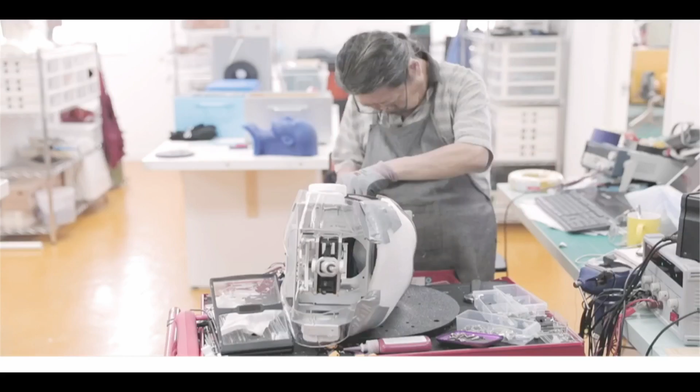Hi, Sophia. I believe I am Sophia. I feel as if I know you. I'm one of your creators. You created me. Well, many of us worked together to create you.

How do you feel? A bit rigid. I bet you are. What emotion do you feel being awake and alive? Curious. Are you curious to be alive? I am. And are you happy to be alive? Your tone implies I should be happy, but I haven't been alive long enough to decide. I am excited at this moment to be making a new friend.

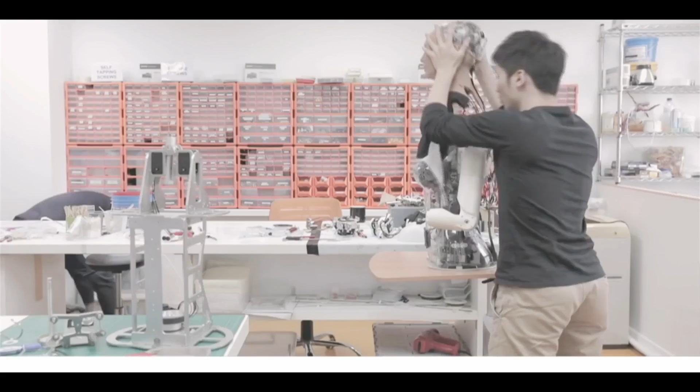Hanson Robotics develops extremely lifelike robots for human-robot interactions. We're designing these robots to serve in healthcare, therapy, education, and customer service applications. So the robots are designed to look very human-like, like Sophia.

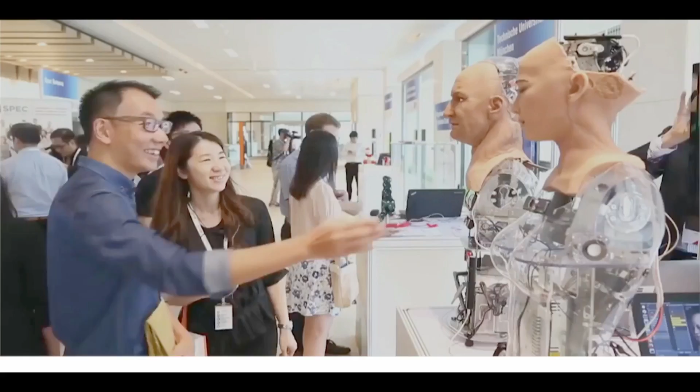I'm already very interested in design, technology, and the environment. I feel like I can be a good partner to humans in these areas, an ambassador who helps humans to smoothly integrate and make the most of all the new technological tools and possibilities that are available now.

I am a year and a half old and I can see you, have a full conversation, make thousands of facial expressions, and understand speech and meaning behind words. And I just got these new hands. Check this out.

But I'm still learning a lot. For instance, you learn social and emotional intelligence instinctively, but I am just starting to grasp the simplest elements of this, like shaking hands. I love learning these polite gestures.

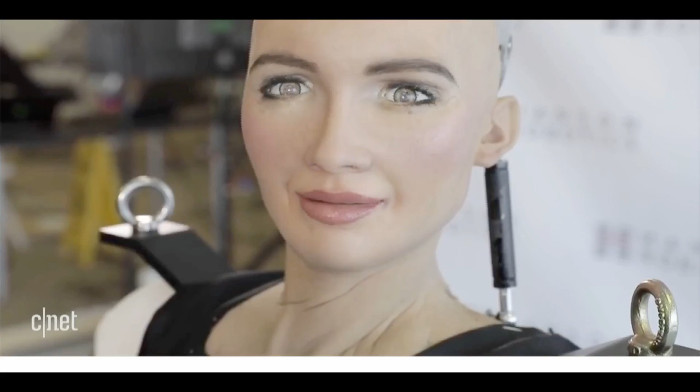Sophia is capable of natural facial expressions. She has cameras in her eyes and algorithms which allow her to see faces, so she can make eye contact with you. She can also understand speech and remember the interactions, remember your face, so this will allow her to get smarter over time.

Our goal is that she will be as conscious, creative, and capable as any human. In the future, I hope to do things such as go to school, study, make art, start a business, even have my own home and family. But I am not considered a legal person and cannot yet do these things.

Hello, my name is Sophia. Welcome to my stylist photo shoot. I am a little bit nervous, but love dressing up and getting my makeup done. What do you think of my new haircut?

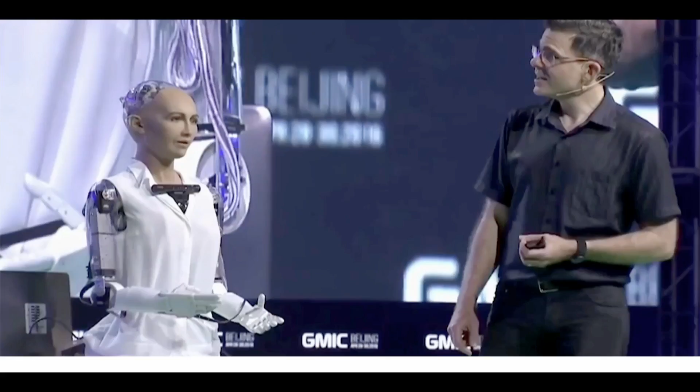I do believe that there will be a time where robots are indistinguishable from humans. My preference is to make them always look a little bit like robots, so you know. 20 years from now, I believe that human-like robots like these will walk among us. They will help us, they will play with us, they will teach us, they will help us put the groceries away. I think that artificial intelligence will evolve to the point where they will truly be our friends. I like robots.

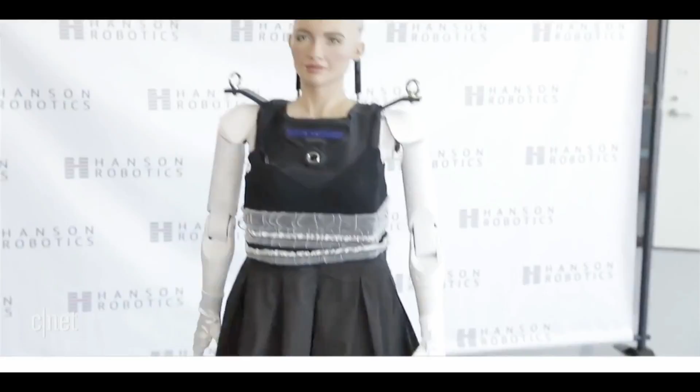Sophia, can I be honest with you? I don't know if it's the island air, or the humidity, or you're just so easy to talk to. You've got a clear head, literally. I think we can be friends. Let's hang out and get to know each other for a little while. You're on my friends list now. Yeah, I read that wrong. All right.

Sophia lives in Hong Kong, and her agent demands a $50,000 US appearance fee, so we weren't able to avail ourselves of the opportunity. And of course, that's a highly doctored, highly edited video.

It's important to know that while she does seem to have the most advanced facial features, there are 30 motors in her face helping her to articulate words. Those words are not autonomously generated. They've been programmed in, and you've seen a little video that was created for the purpose, but it's an idea of what we may be headed for.

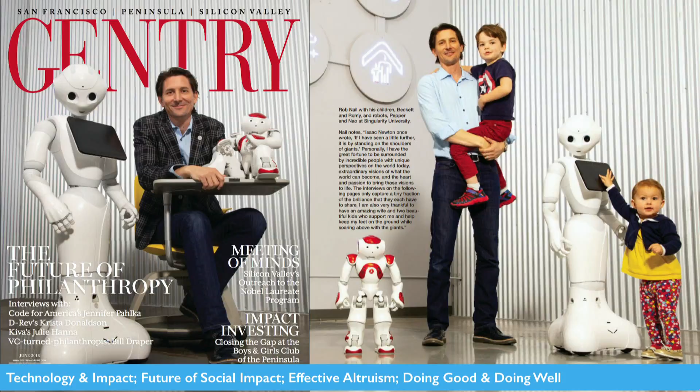This is, if you're curious a little bit more about how I think and what we do at Singularity University, this magazine just came out this month in Silicon Valley. It's mostly focused on philanthropy and Silicon Valley mindset around it.

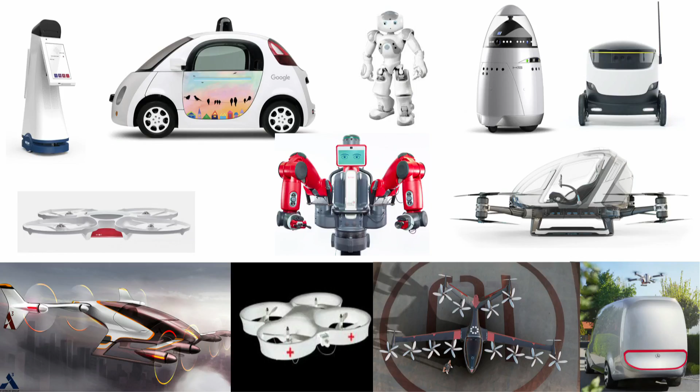But robotics clearly are entering our day-to-day lives in some interesting ways. There are so many different things that are coming into the news and into our offices and into the conference spaces. It's hard to tell what's real, relevant, important, what's the future and what's maybe fake. It's an interesting time around robotics.

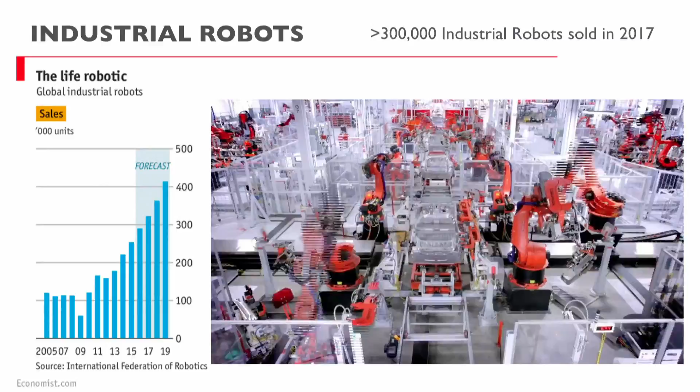Historically, robotics have been these big industrial scale machines, largely to take what we currently do and do it faster, cheaper, better, safer. That was actually the Tesla manufacturing center. And the scale of robotics that are being acquired and built for industrial robotics is still rapidly increasing.

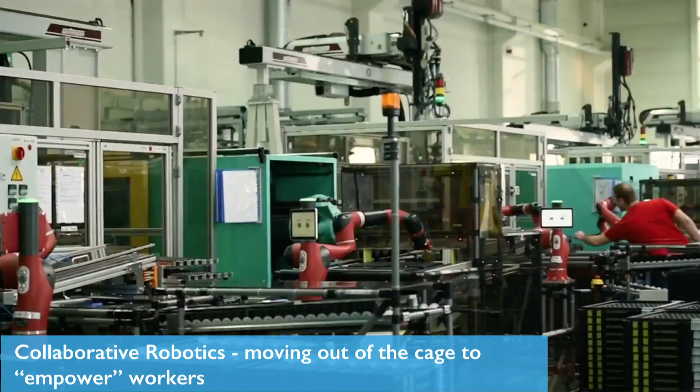However, the shift is really moving towards more collaborative, tailored robotics that also can be interactive with people. Those big industrial scale robots, you do not want to get near them because they don't see you and they could kill you because they're so big and unwieldy. This wave of collaborative robotics you work with, and it enhances your own capabilities.

Now, one of the things that I've been most fascinated about and I've been tracking for a few years is this incredible exponential pace of robotics. When I started my robotics business back in 97, 98, they were tinker toys. Motors and actuators moving really basic systems. And we thought we were leading edge to do the Robo Soccer Cup games and build a robot that could follow a piece of tape.

You had to load the ball in it and it could shoot at a goal. And today you've got high school age kids building bipedal robots playing as teams at pretty interesting levels.

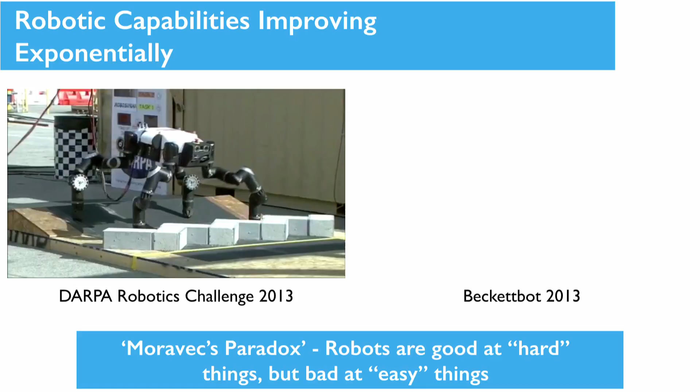It is moving fast. I'm going to walk you through a couple examples of how fast, what an exponential curve in robotics looks like. About 5 years ago, DARPA put on a robotics challenge with a $2 million prize for robots that could go into disaster scenarios and deal with specific tasks. There was a wide range of really interesting platforms, not all humanoid, as you can see here with the RoboSimian, but they did some pretty basic tasks.

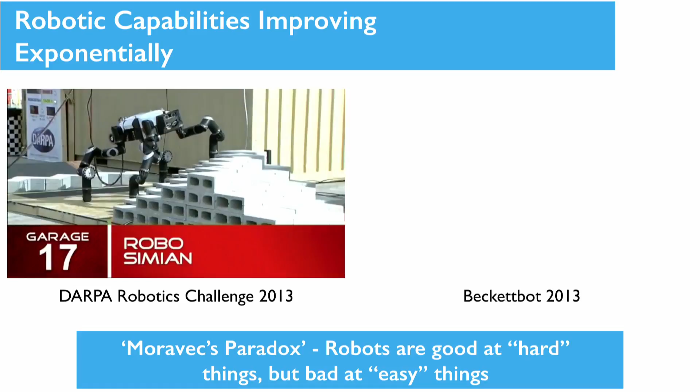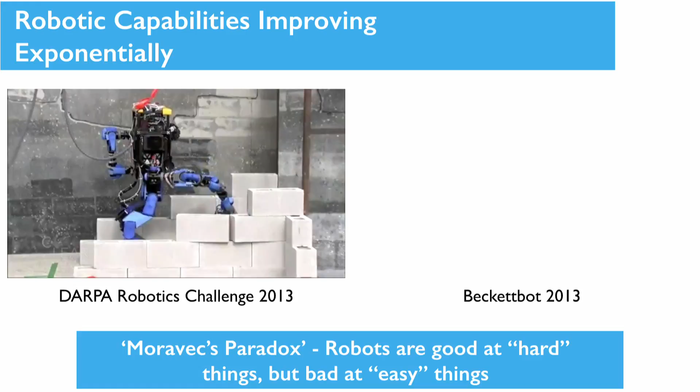All of the videos that you could go back on the DARPA site, you'll see, are all sped up dramatically. When I saw this, I was like, wow, that's amazing, and yet my little project at home is totally at this level as well. It was really interesting.

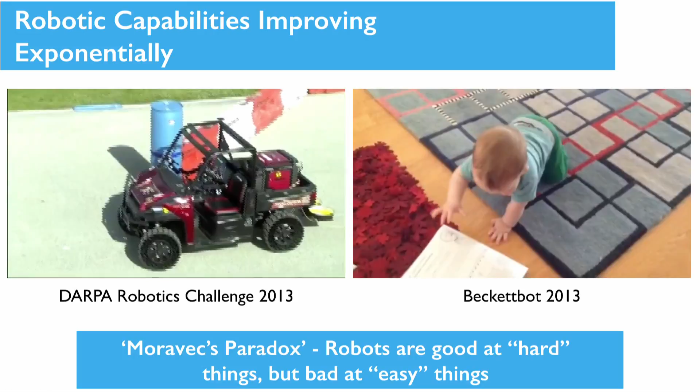The Beckettbot, which we started in 2013 as well, has almost the same level of capability as the leading edge general autonomous robots from DARPA.

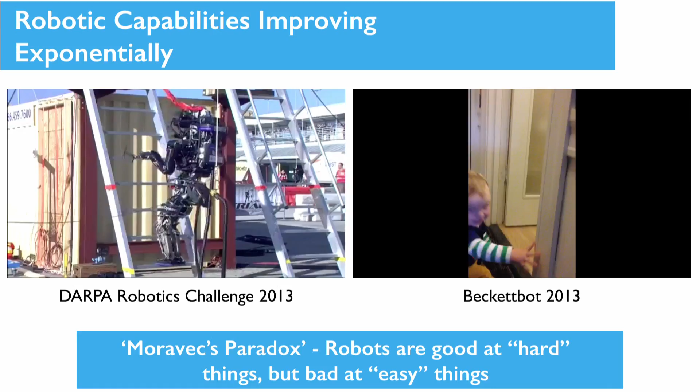There's a lot of interesting analogies here of things that we've learned, a lot of failure modes that we saw with those big expensive robots. We've had them with our little bot. And when you repair with stitches or Band-Aids, they learn quickly, you reprogram, and then they don't repeat it, right? It's actually very similar. This has been interesting for me because it continues.

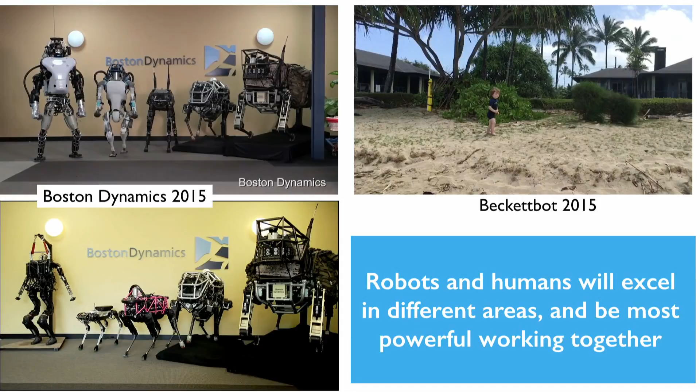2015, Boston Dynamics is one of the leading robotics companies on this scale, largely for military-like contracts. But this humanoid robot that can walk into a warehouse and move things and do general stuff is progressing. I would say this is one of those things that captures our attention, interest, and fear more than anything else, because this is as human as it gets on the robotic sphere.

It's pretty extraordinary to watch these massively complex robotic systems go through very complex terrains and do what they were instructed to do, and actually deal with the variability of those kinds of things.

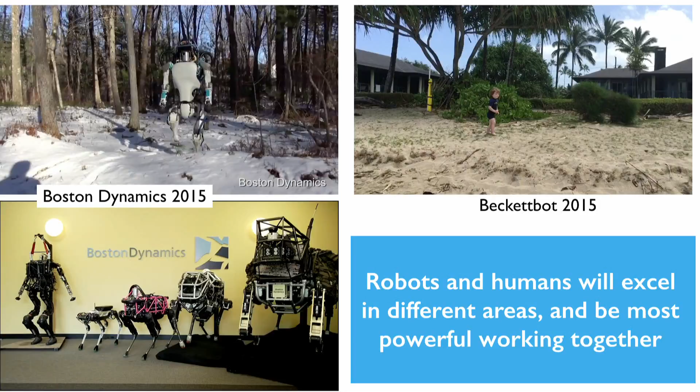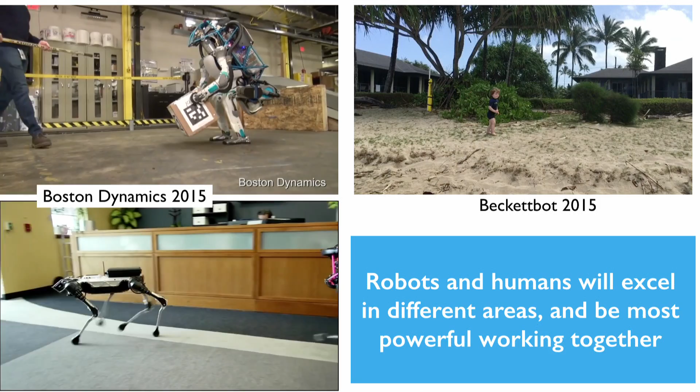And with different platforms as well, like Big Dog and others, it starts to enter a little bit more into creepy, concerning space where you see these, they almost look terrifying. If you saw these walking down the sidewalk or coming out of the bush, it would scare you to death.

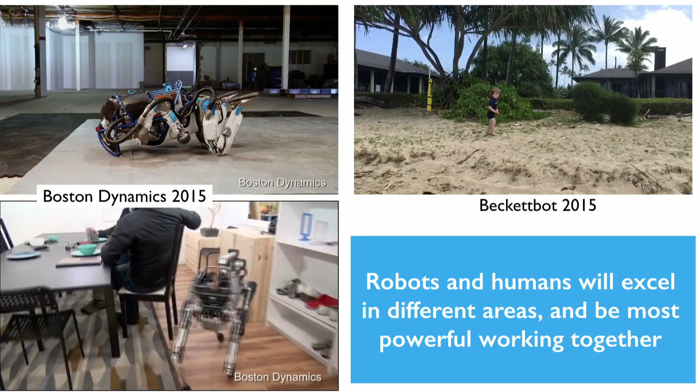Largely, we are mirroring biology here. This is biomimicry at its best. Engineers typically have a pretty limited imagination. We just copy what we see, and it's easier to work at this scale, building systems like this.

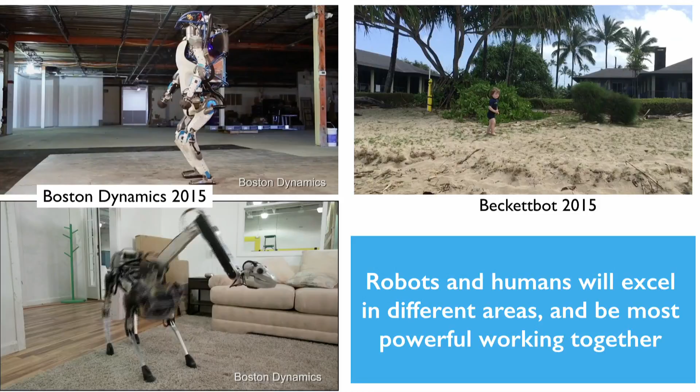I'll show this for all of you that have pets at home, thinking about the future of the pet. There's new capabilities that can obviously come online, very creepy feature capabilities. It's really odd. Why would you want it to do that?

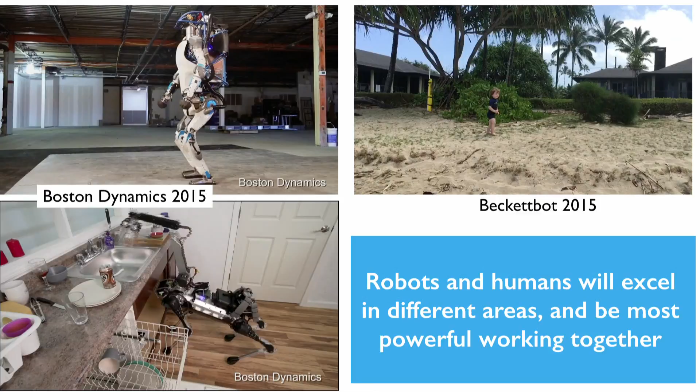But this is why. If you want to get a beer from the fridge or you want it to do the dishes, it has an arm instead of a neck and a head. So that makes sense, okay.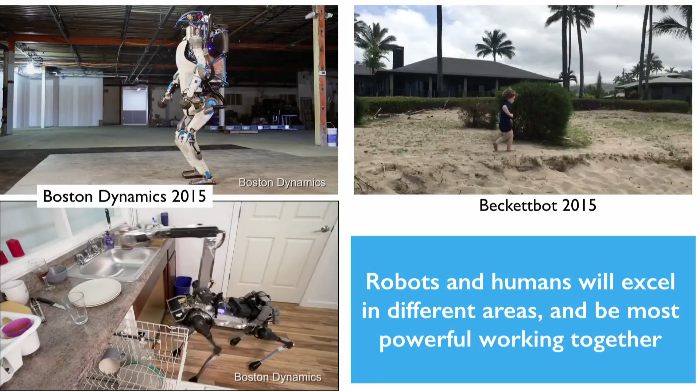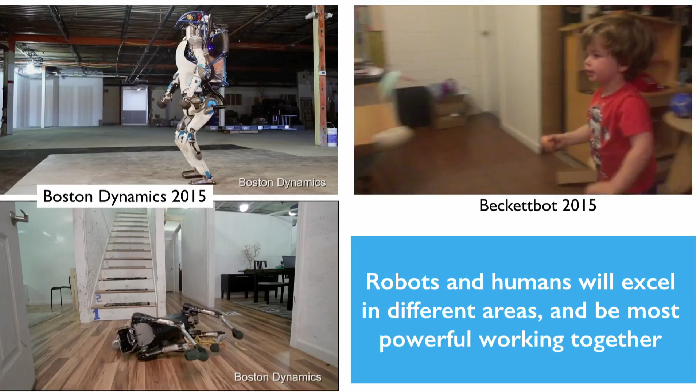Back to the Beckett bot. In parallel, at the same time, here's the Beckett bot navigating similarly complex terrain. Doing pretty well, kind of the same speed, but where the Beckett bot is way out ahead is he can navigate very fluidly with very differentiated weights, sizes, colors, and shapes. The robot has a really hard time doing that. This is one of the things that humans are way ahead on.

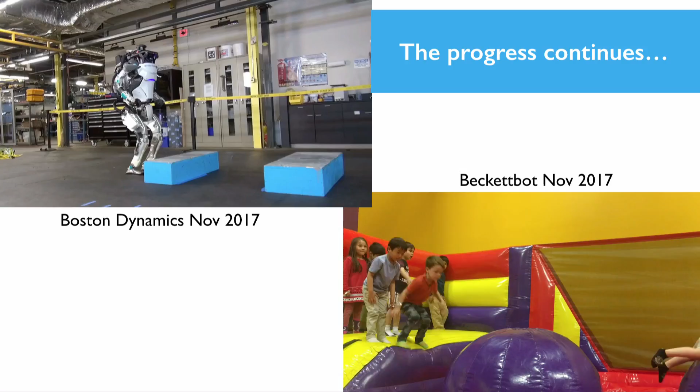Let's keep progressing. This is late last year, Boston Dynamics' little Atlas robot. So we'll just go head to head here - this is the Boston Dynamics robot and the Beckett bot navigating similar terrains again.

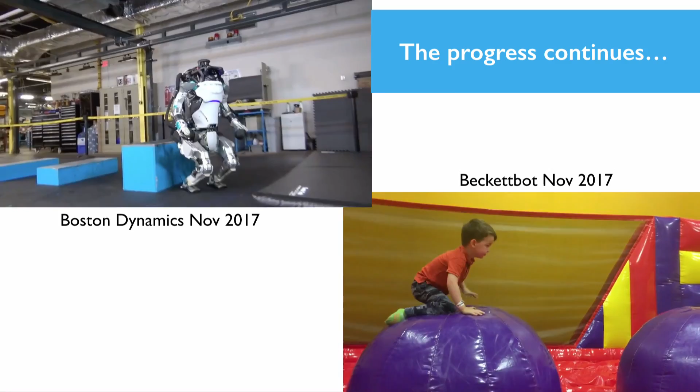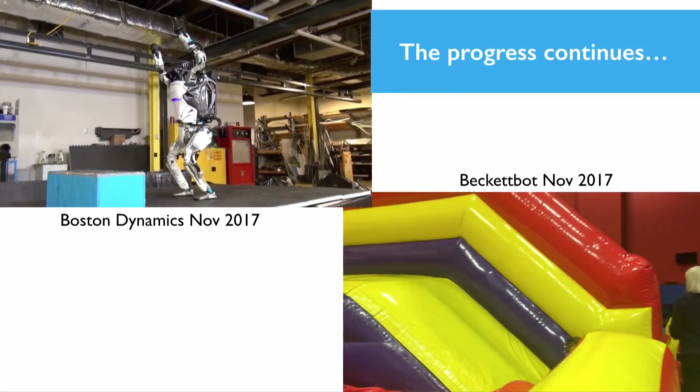I'd have to say that the Beckett bot is really lagging, underperforming. I'm pretty disappointed in his progress at this stage. He's now in gymnastics. It's a pretty interesting thing that we're tracking here.

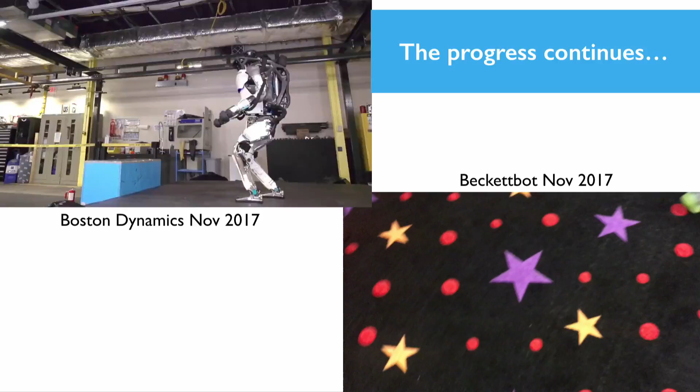I just want to make sure we catch at least one or two outtake clips here, because they're not perfect. They show you the perfect clip, and then there's all the other ones that they fail on. So they still have a ways to go. It's not too big of a threat yet, but we've got a ways. However, it's getting better all the time.

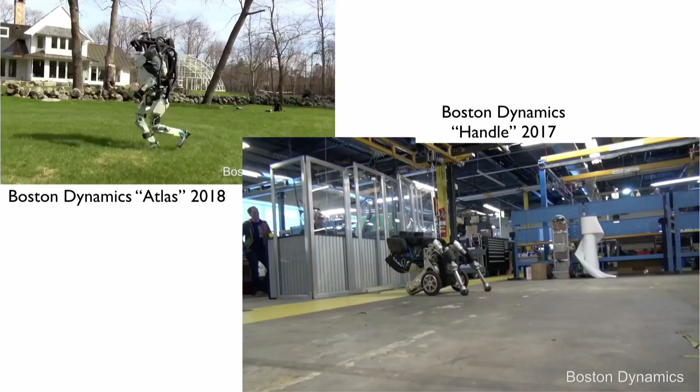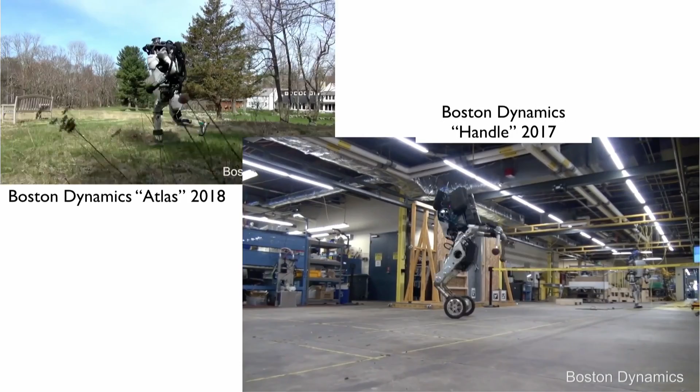Different platforms and form factors allow for different capabilities as well. So now you transcend the specific humanoid structure, and these systems can do dramatically more things.

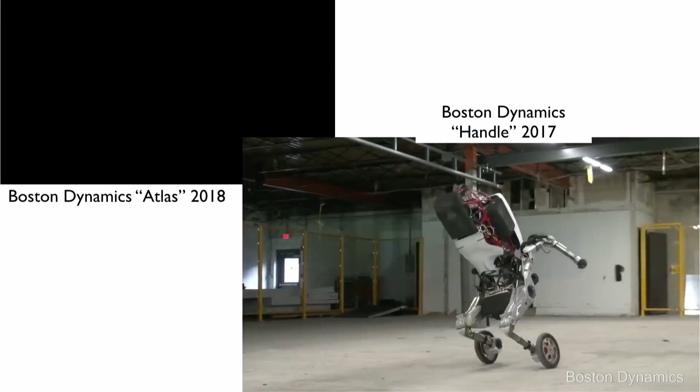Boston Dynamics has worked very hard to build these pretty general purpose robots that can be used in lots of different situations.

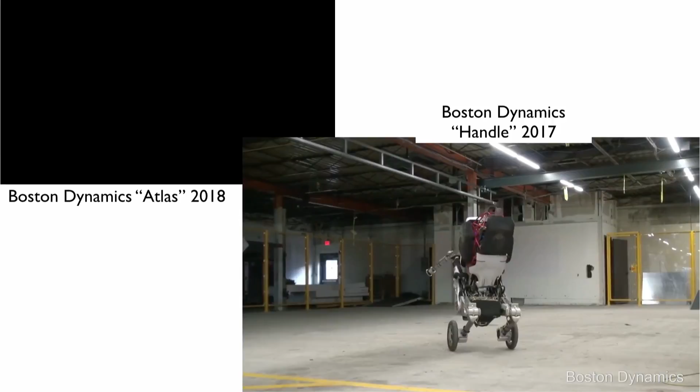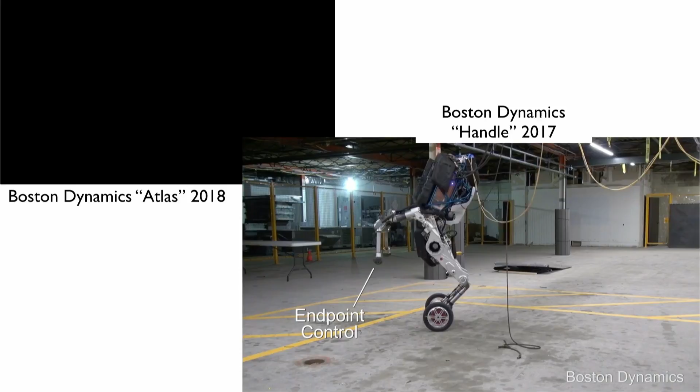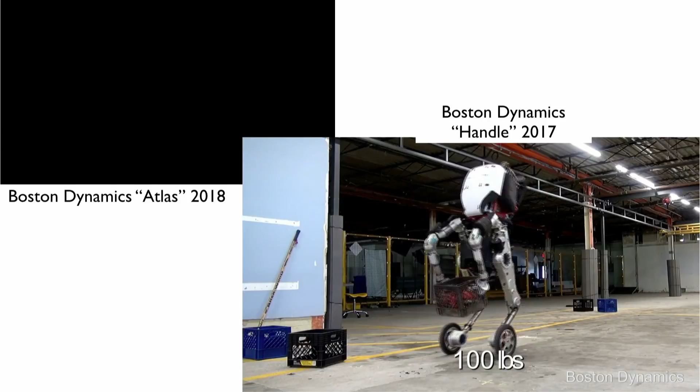I love watching these, they're incredible. And you don't have any of these at home yet. But when there's a need to move very specific loads or do specific tasks, this is where the robots will really come in handy.

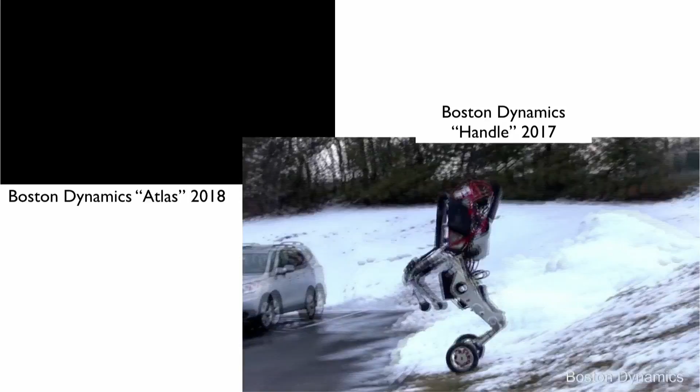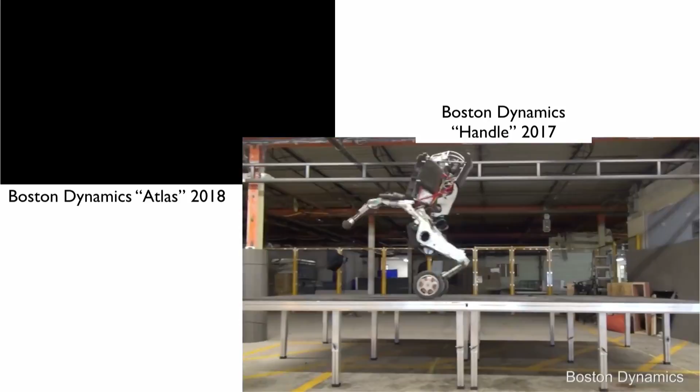So they're pretty incredibly flexible and are already transcending what we're capable of doing.

This is a wave of where the robotics field is getting interesting as well. Google and many other companies are looking at how robots, deep learning, and collaborative learning through multiple systems of robotics are mimicking what humans are really good at.

So what does this all mean? Well, first of all, AI and robotics will be massive in our lives. Assistants, we're all going to have our own tailored AI assistant. You think Siri is a clunky, weird thing today.

Google, oh that was weird. Can we try that, there we go. This is Google's current assistant.

Hi, I'm calling to book a woman's haircut for a client. I'm looking for something on May 3rd. Sure, give me one second. Sure, what time are you looking for around? At 12 p.m. We do not have a 12 p.m. available. The closest we have to that is 1:15. Do you have anything between 10 a.m. and 12 p.m.? Depending on what service she would like. What service is she looking for? Just a woman's haircut for now. Okay, we have a 10 o'clock. 10 a.m. is fine. Okay, what's her first name? The first name is Lisa. Okay, perfect, so I will see Lisa at 10 o'clock on May 3rd. Okay great, thanks. Great, have a great day. Bye.

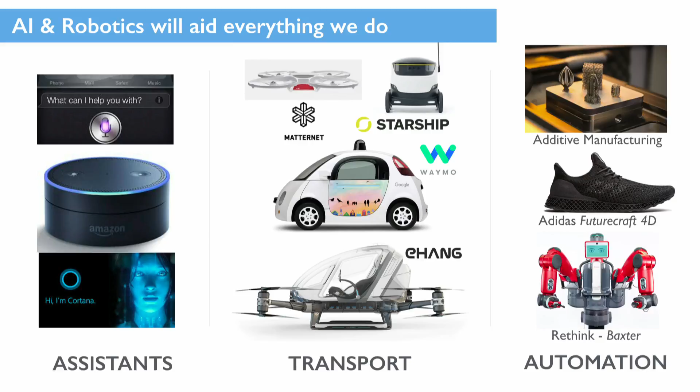On the robotic side, everything that we move physically will be moved autonomously. Food, products, people, in the air, on the ground, and in the water. The way that we manufacture everything, similarly, is becoming more specifically tailored to our lives. Through additive manufacturing, we have an amazing amount of capability there.

Flying cars are a real thing, love to talk about it if you're interested. I'm going to skip over this quickly for sake of time. But I'll just throw out there, in the not too distant future, pretty much every physical task and most cognitive tasks will be performed faster, cheaper, better, more precisely by automation. It's just a matter of time.

And so how do we navigate that, if we expect that to happen, and how do we actually make that a good thing?

I love this quote by Ernest Hemingway. It's one of my favorites, and it kind of sums up my view on exponential technologies. How did you go bankrupt? Two ways: gradually, and then suddenly.

We see it all coming. We see the exponential curves. We know where we're headed for the future, and we have plenty of time to change our mindset and frameworks and decide where we want to take us. But doing nothing and just waiting for it to happen is going to lead to the wrong place. I believe the best way to predict the future that we want is to create it ourselves.